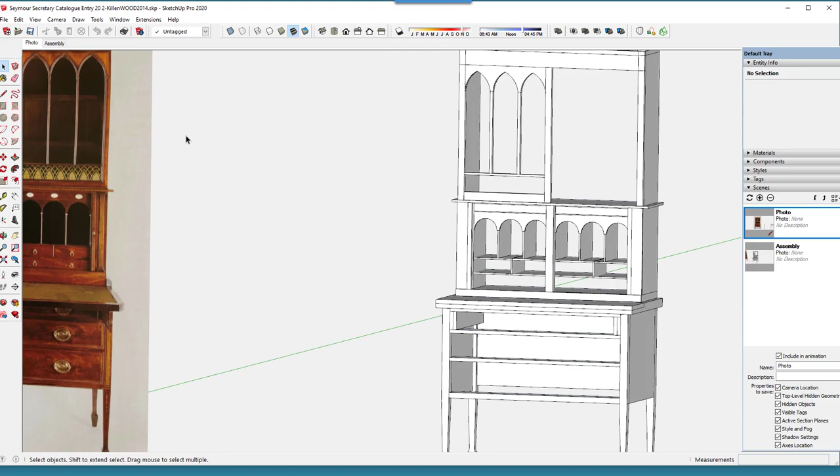I'm starting the design of a new piece that I would like to construct, using a photo from a book called The Furniture Masterworks of John and Thomas Seymour. This is a Seymour secretary.

It's quite an elaborate piece of furniture, and I've not been able to find much information about it outside of what's in this one Seymour book. This picture is the only picture in the book.

It doesn't work very well. I tried to use Match Photo in SketchUp, but I could not get the alignment of the axes correct on this photo. It's probably been cropped or doctored in some way that makes it difficult.

So I've just imported the photo as an image, and then I resized it. First of all, I straightened it so that it was aligned with the axes in SketchUp, and then I resized the photo to approximate full size.

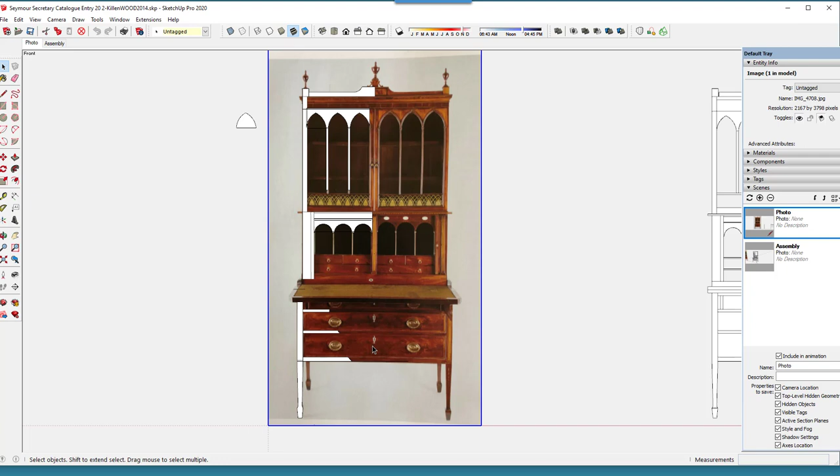The book does give the overall dimensions of the piece, so I was able to use those dimensions to, for example, set the picture so that the dimension across the width matched whatever the dimension in the book was.

So then I began to trace over the piece, and you can see these little surfaces here where I've traced over parts of the piece. I started with the leg, and then once I get a plane - which that's all this is, it's not a 3D component.

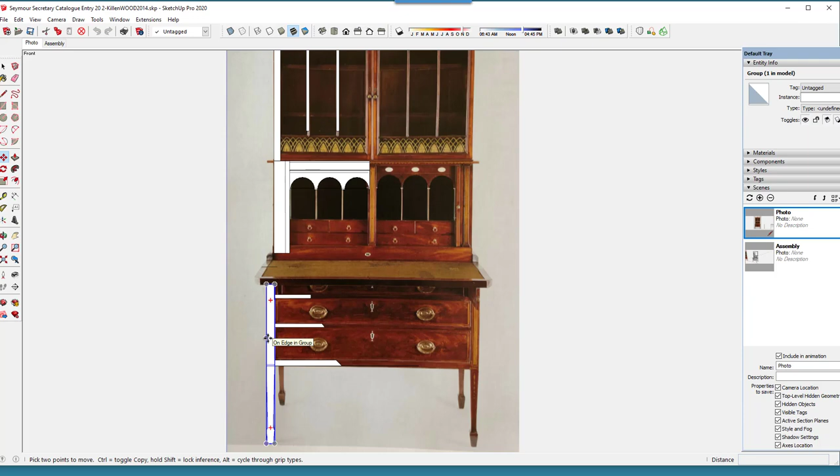Let me just pull it over here. It's just a plane, a flat surface with no thickness, and I use that then to create the actual 3D component.

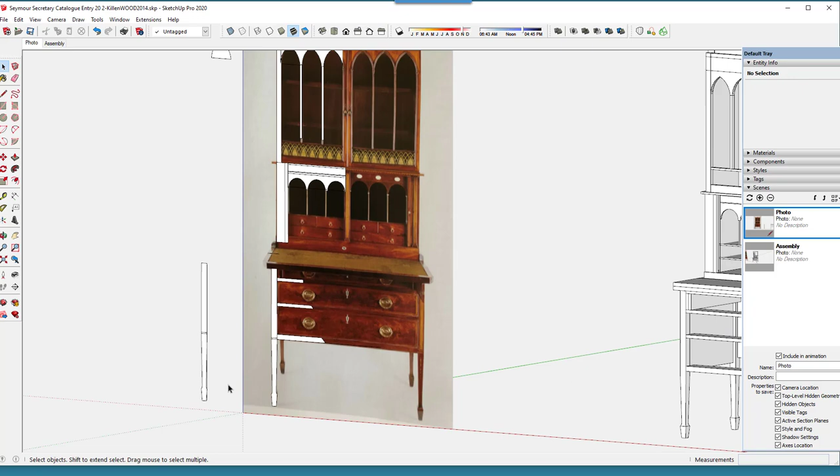So I've taken these shapes and brought them over to the assembly, and here you can see the legs and the drawer rails.

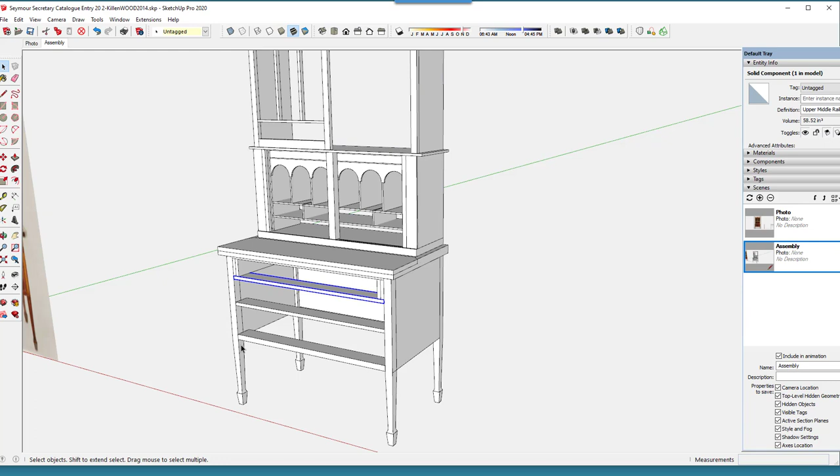This is a very simple model at this stage. It has no joinery, it has no decoration, inlay work, or molding shapes, or what have you. It's very preliminary.

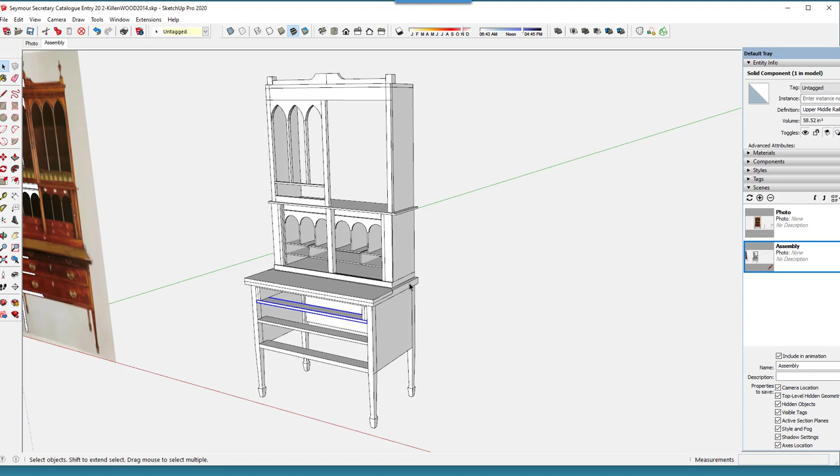There are three stages, or three assemblies. There's the lower assembly section here, which has the hinged writing surface, and then there's the middle section here with pigeonholes and small drawers, and a tambour door, two doors that I haven't modeled yet.

And then there's the third section, which is the bookcase section with these hinged doors in the front, glass with some glass. The drawers, 3 drawers, lots of hardware, lots of inlay decoration, bandings.

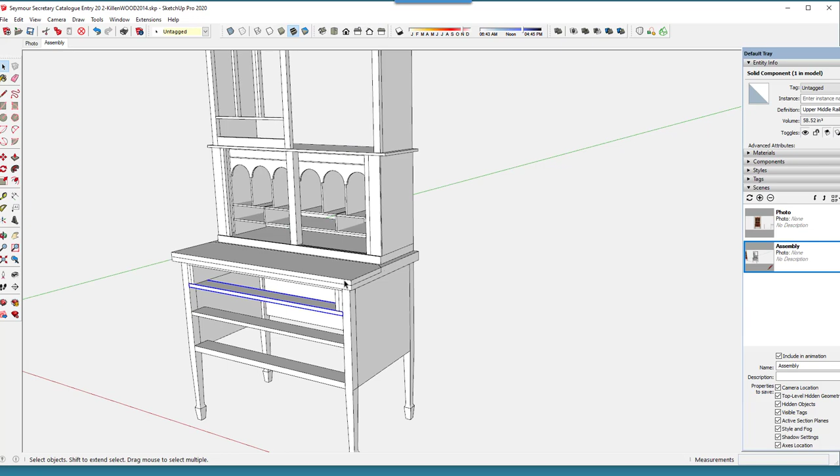This writing surface, I think I can probably show it. These are 3/4 inch pieces here, and if I just get the rotate tool and hit the right arrow to get the red axis,

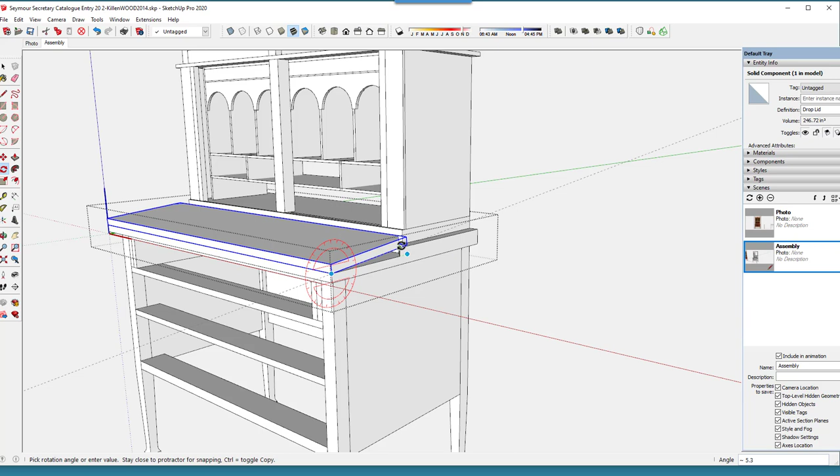then I can raise this up and bring it down 180, and this is the writing surface.

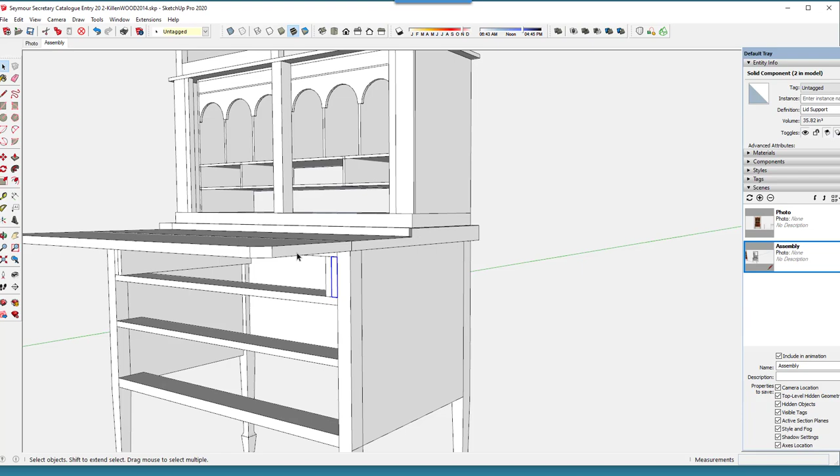Of course, there are supports for that lid, or that half of the top here, and these supports will come out, pull away from the lower part here to provide a support for that hinged lid.

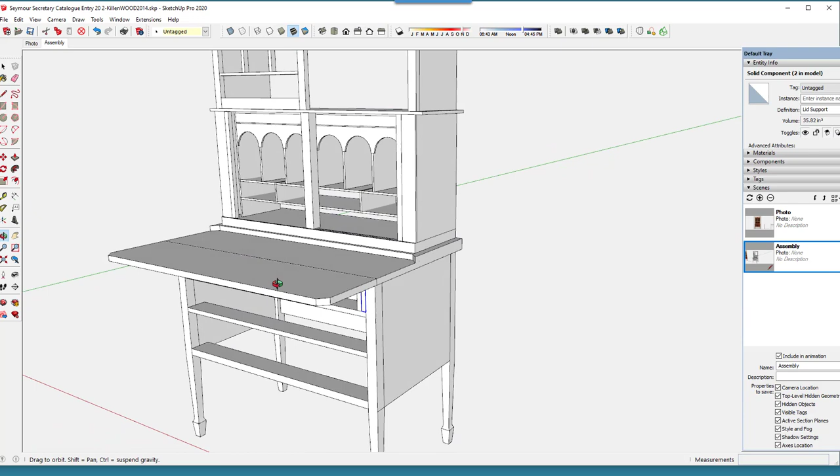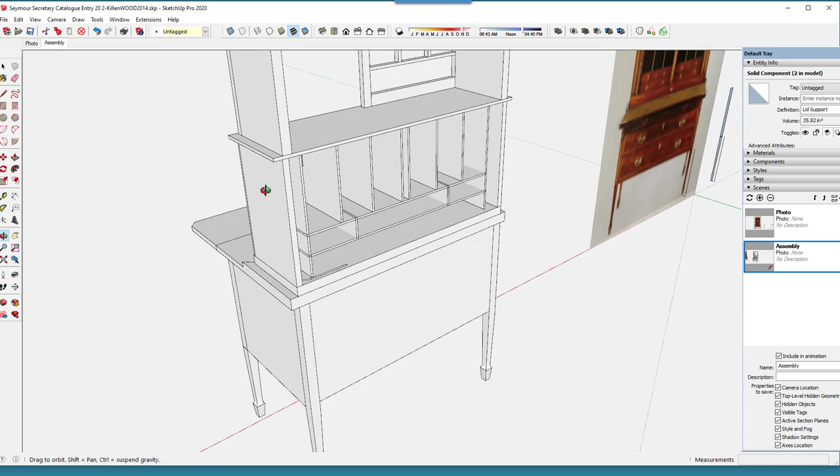So there's quite a bit of detail work that will need to be done. One thing that I was particularly interested in - I've not done tambour doors before.

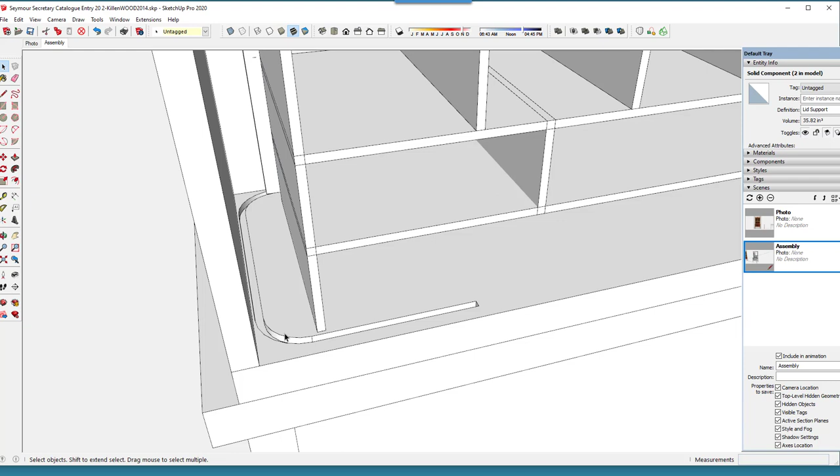So the tambour door requires a groove in the bottom and the top surface so that that door can open up and even come around the back surface here.

So I've done a little bit of exploratory work to locate these internal structures so that there's space for that door to come back on through this groove.

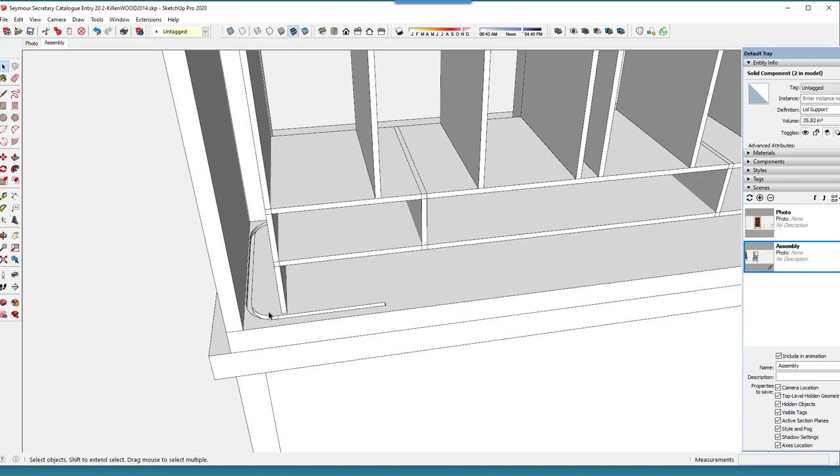So this will take quite an amount of time to do the detail design. I want to get this preliminary structure set that I'm happy with before doing joinery, for example, or any of the decoration. So I'll be working on making sure that I've got a good structure here first.

This will all be mahogany, and there's quite a bit of hardware as well, so lots of modeling to do, and then I can buy the lumber and begin the construction in the shop.